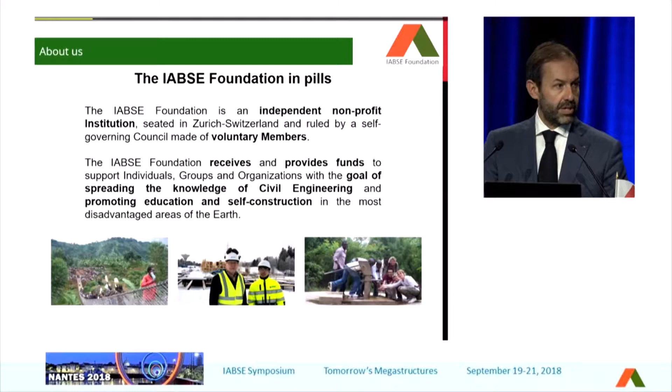The challenge last year was to build a footbridge in Uganda, a footbridge with a very high symbolic value and meaning. A bridge can reunite two separate parts of a village which is cut by a river, flooded during many days of the year, more than 4 months. Of course, that creates problems to locals, and we will see what kind of problems in a while.

The partners of this venture: the project was proposed by Bridges to Prosperity, and we took the advantage. It was a very interesting project. IABSE is everything about bridges, and so we thought it was a fantastic occasion to have the chance to build a bridge.

So we took this challenge. We decided we wanted to be a partner in this venture, and we shared the price with Ramboll. That was the other partner that paid for 50% of the cost.

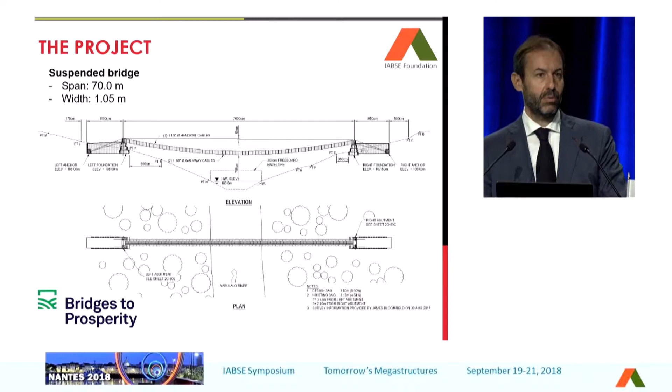The most important part, the team of volunteers. These guys are engineers, and they decided to go on site and put everything they had in order to get to the final result. Young people, a lot of energy, a lot of enthusiasm under the flag of IABSE.

The local community played a fantastic and key role in the construction of the bridge. They showed very high motivation. They were trained before the beginning of the construction.

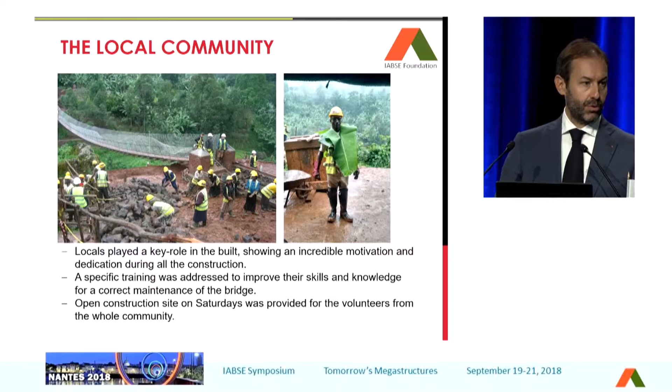They got a period of training, and on Saturdays, the work site was fully open for the local community to come and enjoy, and of course contribute.

So before the arrival of the IABSE group, some works have been done, preparatory works for the foundations and abutments. You can see a fantastic detail of the cable saddle there with the truck wheel. So everything was full of energy and full of enthusiasm.

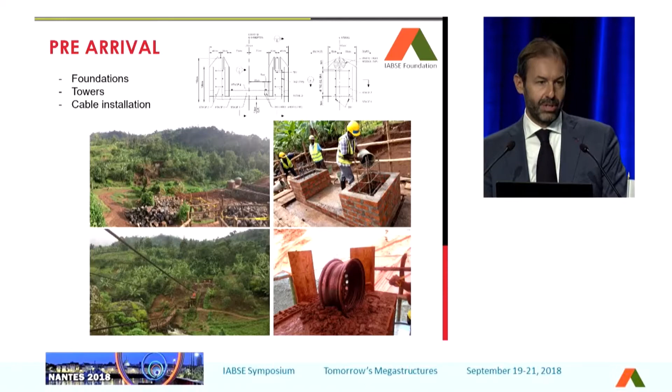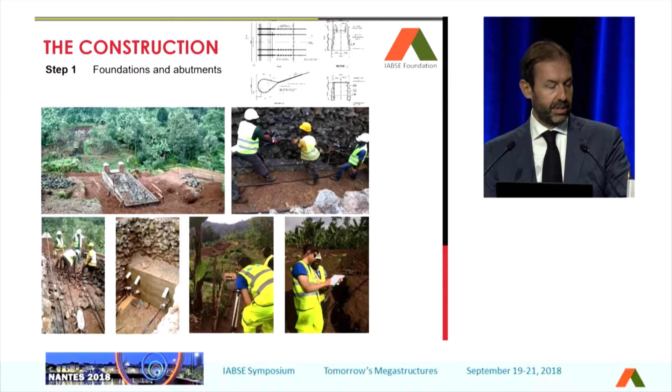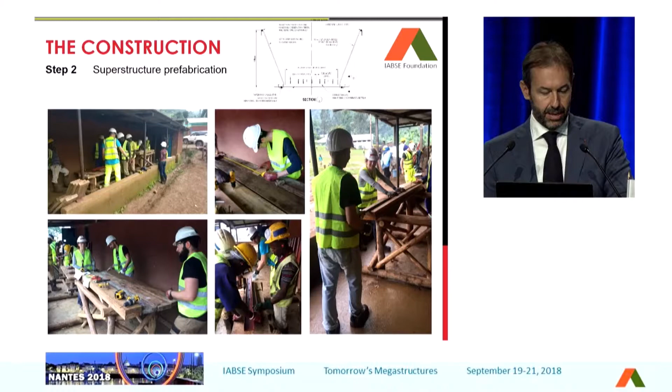Then the IABSE team arrived, and with the local team, Bridges to Prosperity, and the Ramboll team, completed the foundations and the abutments. Our engineers worked as carpenters to prepare all the details, to lay the cables, to bend the bars, to prepare the fences. I have to say I'm very proud of it.

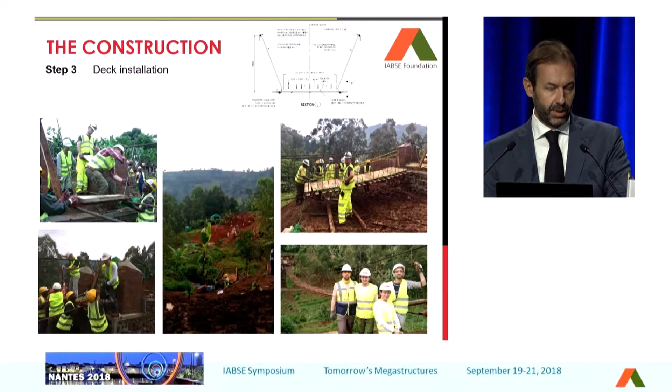We started from the beginning, and roughly in one month, we got to the completion of the bridge. You see here some phases. I have to say that I'm very thankful to the team that worked on that. And we finally got the opening of the bridge with the dynamic test of the structure.

Very risky, actually, because we made some measurements about the frequencies, and we were very concerned when we saw people jumping, dancing on the bridge. You see here this guy, Sir John.